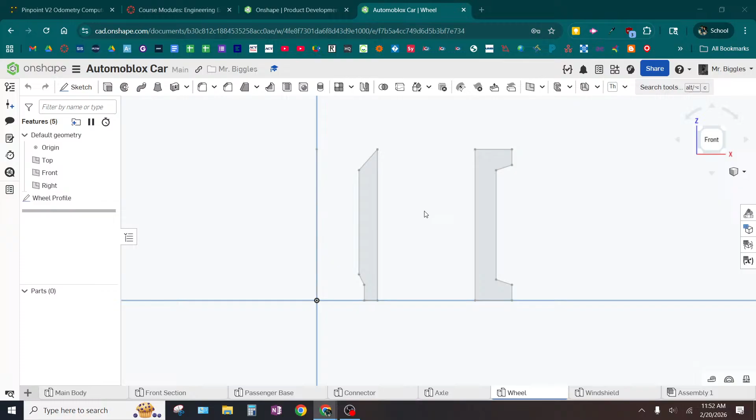So yesterday we got to this point, and I would encourage you to get back into that sketch.

So this here is like the outer wall, and this is the inner wall. Don't do this, but I'm going to just quickly revolve just to prove what this is going to look like. So that's kind of how that's going to turn out. Okay, we're good, we understand, I hope.

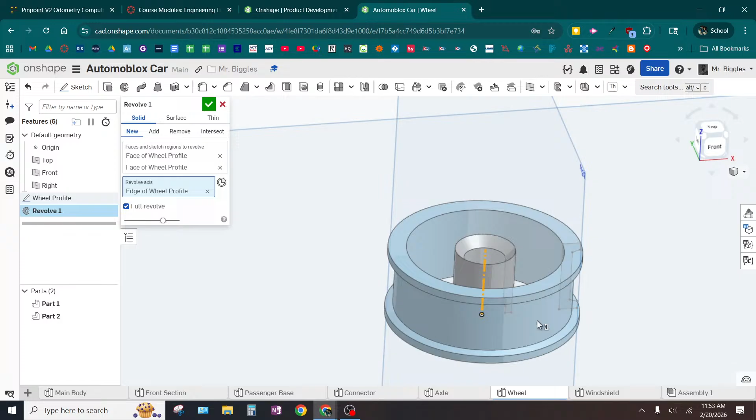All right, so I'm in this sketch, and what I want to do is work on up here. This is like the spokes of the wheel, basically. You actually aren't really doing much at this stage. In fact, you're basically just creating a solid disc that you'll cut into or pattern later.

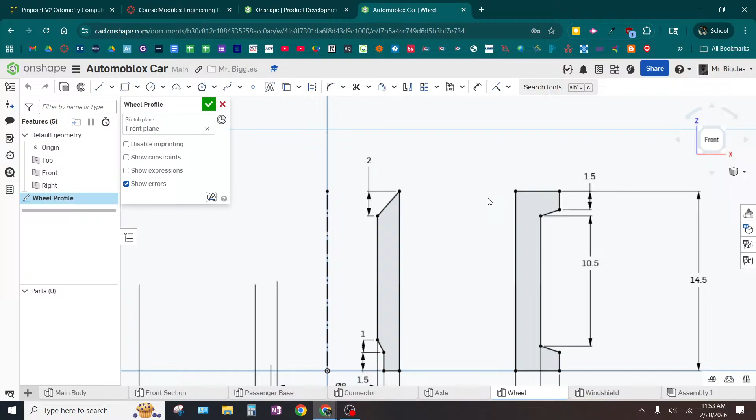So look at your spokes. Most of you, the top is probably flush. I think the purple wheels go in some, and I think the light blue wheels kind of curve out some. But the green, the orange, and the dark blue is just flat.

You do whatever you want, but if it's flat, well, that's really easy. Straight line, easy, problem solved, right? If it's not flat, it's just going to be angled, right?

If you want to do curves, remember, we have arcs. You could do a 3-point arc, okay? That's only going to be part of a circle, though. If you want some curvature that's maybe not symmetrical, remember we do have the spline.

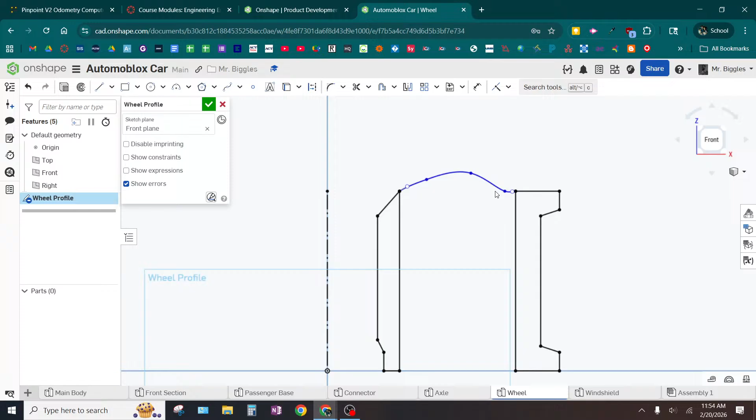So like, you could kind of, I'm exaggerating this, but you could do some crazy stuff like that, right? Probably less exaggerated, might be more like that, right? You could do that. Whatever you think is appropriate.

I'm going to just do a straight flat line. The bottom is a little different. So the bottom, it depends on your wheel. I think for most of them it's mostly just straight and flat, but there is a little bit of rounding, I guess like you'd call it fillets or whatever.

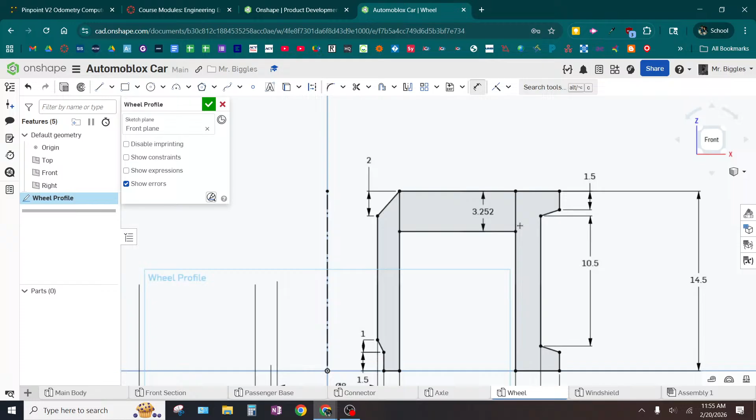So I got a line I'm going to draw across. Ooh, that lagged. Okay, I got a line there. It seemed to be about 6 away. So how did I measure that? I'm using this thing, I thought this was the easiest. I kind of just stuck it in there and just saw how far it went until it kind of was flush with the bottom.

So I got 6, might be a little too much, might be less than that. Let's try that one again. Maybe only 5, probably more like 5.5. Let's just go with 5.

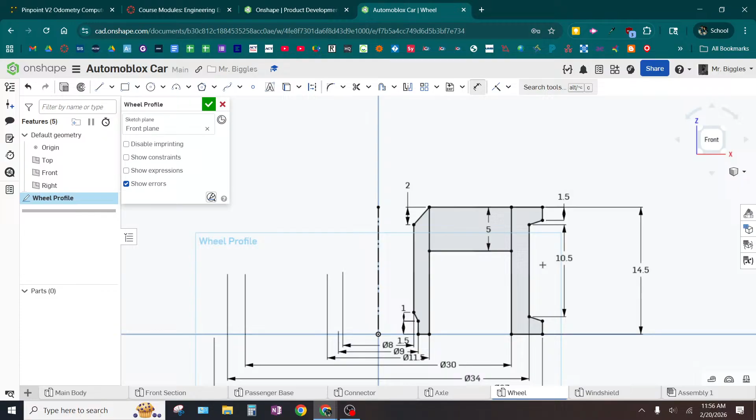Okay, and if that's all you do, that's fine. I do see a little bit of rounding, so like I could do a sketch fillet there, and there. Could do a sketch fillet. Okay, I don't know that it's really going to be perfect, but if you wanted to, I'm going to do it for demonstration purposes.

Going to make it, let's try 2. Yeah, I'll do 2.

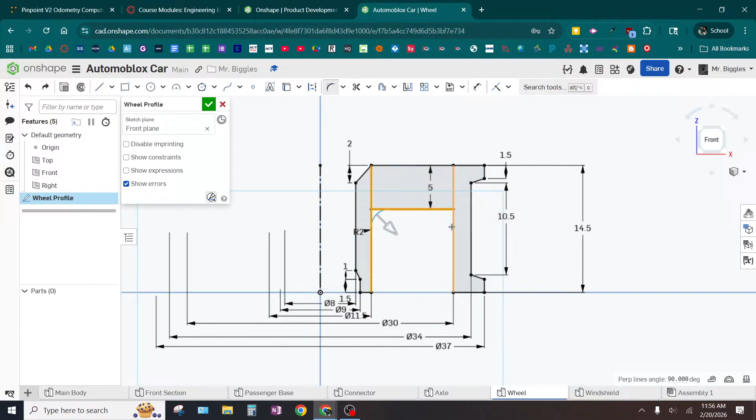I guess I have to do them separate. Unfortunate. There's one. There's another. Notice when you do that, it breaks a lot of your stuff. So if you don't want to do that, don't feel obligated to. But that would be kind of a way to get some of those curves.

All right, so you got options. Let me give you a moment.

Once you got that figured out, you can finish your sketch and we can go do the revolve. Okay, so I'm going to do that. I'm going to keep this one simple.

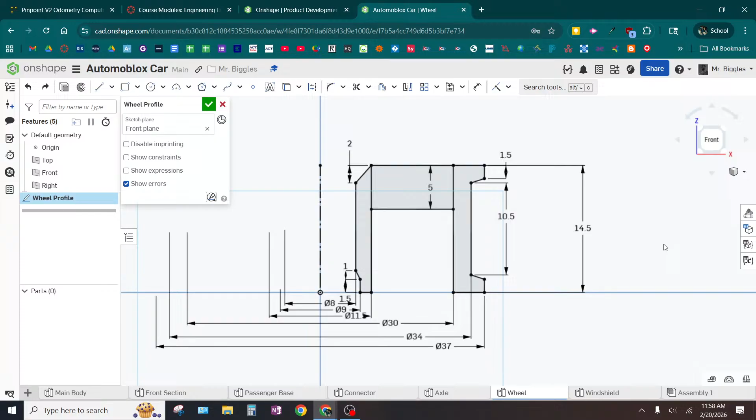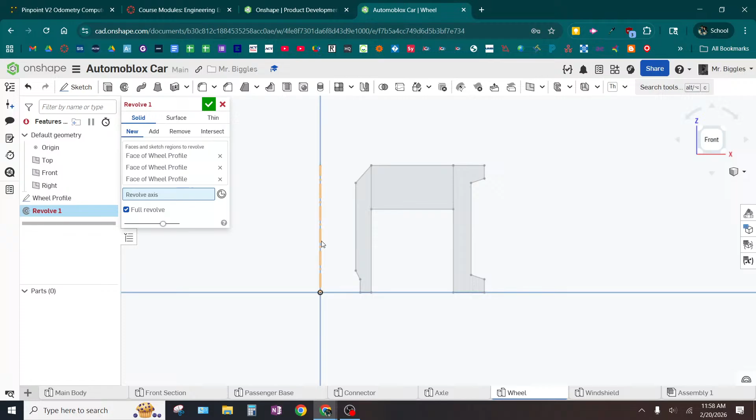So now that I'm done with that sketch, I'm going to go to revolve. Okay, so the first box says faces and sketch regions revolve. So I'm going to click on all the things I want to revolve. And then those revolve axis is red, so I click on the red revolve axis. Now it's blue, blue means anything I click is going to get fed into that selection area. And I'm going to click on this construction line here, and then revolve that profile around.

I don't know if you guys are having internet issues, or if it's just me. Just slower. Yeah, but that's it.

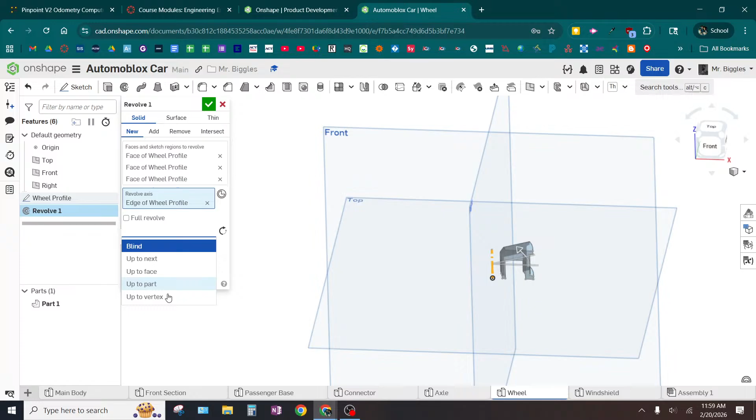That's the revolve. Now, a little aside, you don't have to do a full revolve. You can check this off, and it's really slow, but you can tell it to go a certain number of degrees. Like you have options here. Okay, you have options, but we just want a full revolve. Okay, and I'm done.

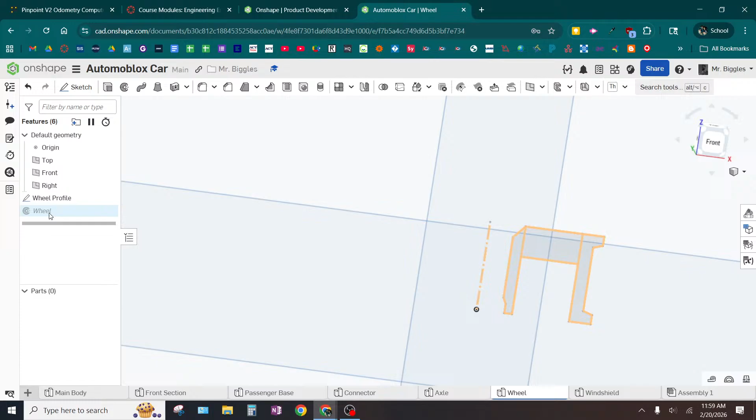So this would just be the actual wheel, the main part of the wheel. And then you look at it - it should be all blue if you connected the inner and outer wall. So in this sketch, I connected the inner and outer wall, so everything should be one part. I shouldn't see multiple parts down here.

If you see multiple parts, either you did not connect them, which could be by choice, or you just designed it wrong. Questions?

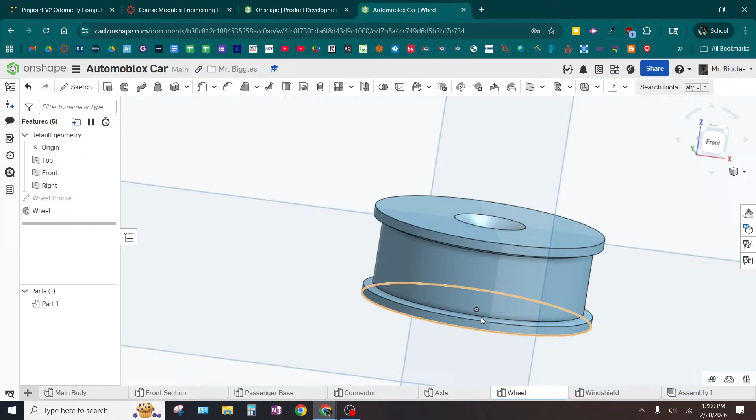Right, we're gonna move forward. So we're gonna sketch on this top surface of the wheel, and our goal is to make spokes. I'm going to show you a few different ways to make spokes.

Effectively what we're going to do is make like one, then use a circular pattern to pattern that cutout. So we're not creating the spoke - we're actually cutting out stuff in between two spokes, and then we're going to pattern it.

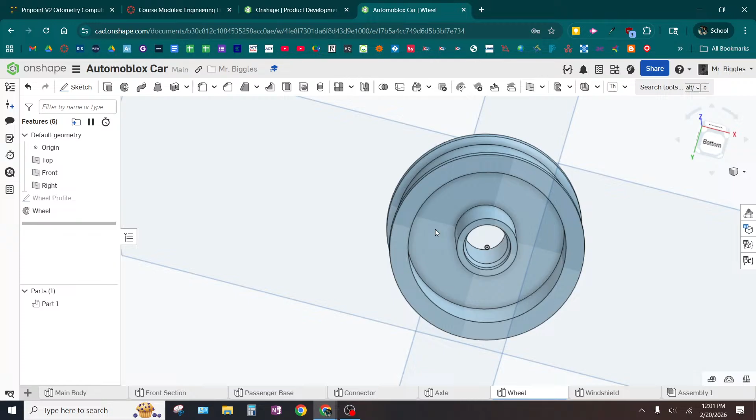You could do this a totally different way. You could create the inner and outer wall and not draw this connecting part in that profile sketch, and then create on this sketch the spokes and pattern the spokes. You got options here. I decided to start it connected because I thought that'd be easier.

So what I'm going to do is make a sketch now on the top. I'm going to name this sketch 'spoke,' singular, because I'm only making one. Technically, I'm actually making the gap between two spokes, but whatever.

Before we start sketching anything, you are going to want to project these inner and outer rings, because that's kind of where you're drawing in between, right? I don't want to interfere with my walls - I want to just interfere with this connective part in the middle.

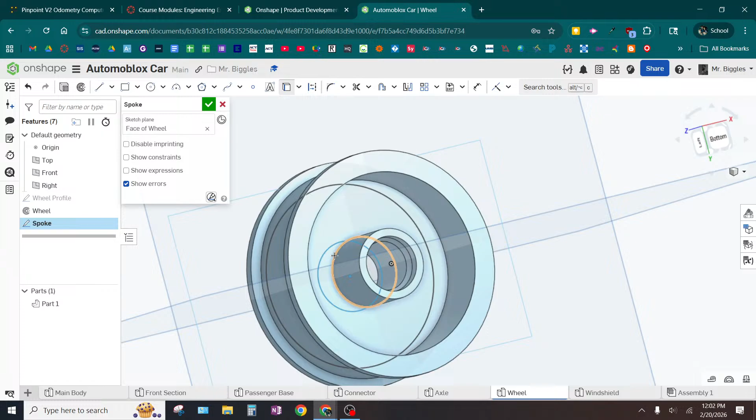So I'm going to click on the Use Project / Convert button - it's next to the A and the Construction button. You click on that, and then you can click on the inner edge, click on the outer edge. And then when you turn around and look at the top, you should see those two black circles, corresponding to the boundaries of the walls that are hidden because they're underneath. Questions thus far?

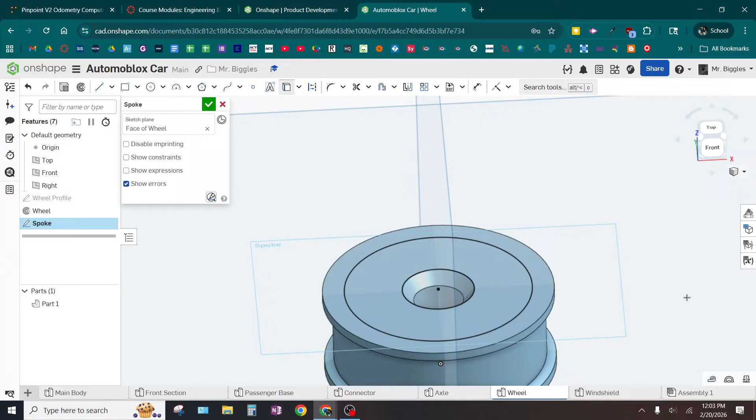So I'm going to draw a spoke. And by a spoke, what I actually am going to do is draw like a void. That makes sense, right? Okay.

How many of you have the green? The green's just like basic lines. Yeah, okay. So the voids for the green would be triangles, right? Effectively, or something like that. Okay, looks like a pizza. Not like fill it. Yeah.

So I'm going to show you - I am not trying to dutifully replicate a specific wheel. I'm showing you techniques to create spoke-like things. We understand? Yes, say yeah? Okay.

So what we could do here, again, I'm on the top sketch. I am going to draw straight lines that go from the origin to this outer circle. So yes, it's kind of like a pizza slice, right?

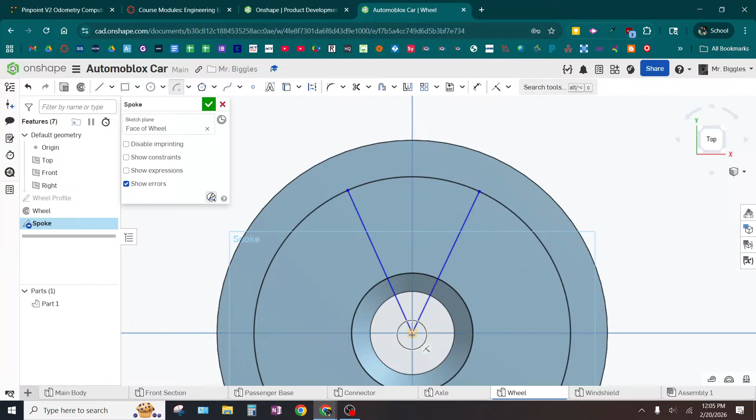And then my second click is going to be right where that line intersects this inner wall, and the third click is going to be on the other line. So notice I can now select this pie slice or pizza slice region - I had to draw that arc to make the beginning of an enclosed shape.

I'm going to do this again, all right - center point circle. I'm going to do the center here.

And then the second click is going to be up here where the line meets the outer circle. The third click is going to be like where this other line meets. I don't know, that got backwards, I don't know what happened there. Oh, maybe I clicked on circle. Not bad, here, arc. There we go, better, click on that.

Second click. Third click. And now you'll notice I can actually select. Do you see how I can highlight this region? You got to do those arcs to get the top and the bottom. If you don't do that, unfortunately what will happen is you'll just have two lines, and you could select the entire area, but it would include this, and you may not want that. I want to be able to select just that.

Now, if you do a quick horizontal constraint, that lines up this vertex with this one right here, that will make this slice, this pizza slice, symmetrical about this y-axis, which is handy. Notice now, by doing that, these two parallel each other - not parallel, but they mirror each other. We see that? They mirror each other.

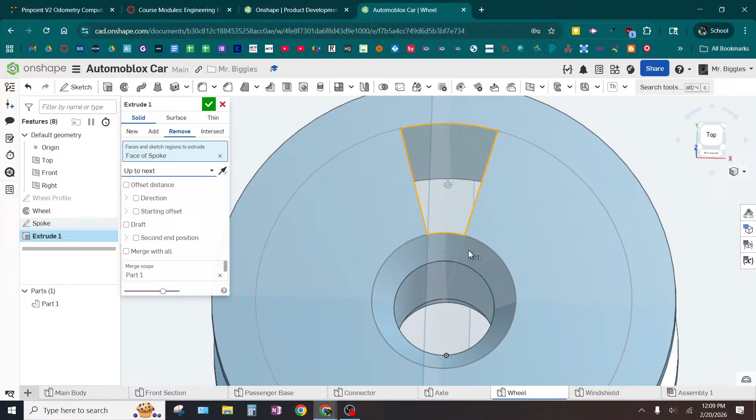Yes, yeah, yeah, and that is one spoke - or at least it's the gap between two spokes. I could even call it the spoke gap instead of spoke. That might make it a little bit less confusing or ambiguous.

Now what am I going to do? Got my spoke gap made. Now what would I do? Pattern, it's just a circular pattern. So we have mirror and pattern kind of close by. Here's the pattern button - you got to click the drop down to choose circular pattern.

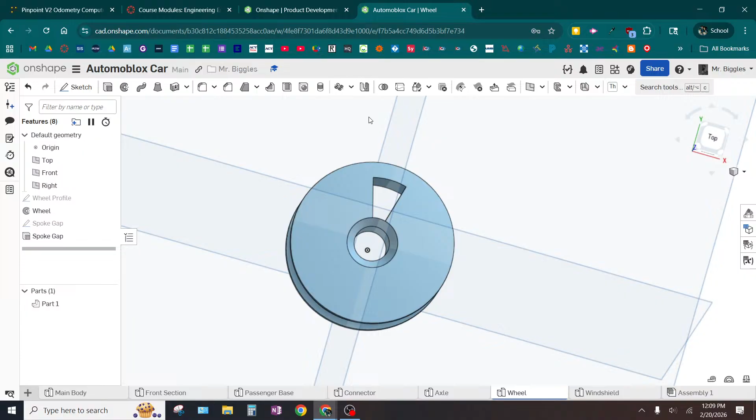What is the first thing you need to do in order to use the pattern? Change it - it defaults to part pattern. You're not patterning this entire part, you're patterning a feature. So you got to click on this and change it to feature pattern. And then you can try and click on stuff, but honestly, if it's like a cut, what are you going to click on? Nothing? That's not going to work. So click on it over here - you can click on it over here, the table of contents.

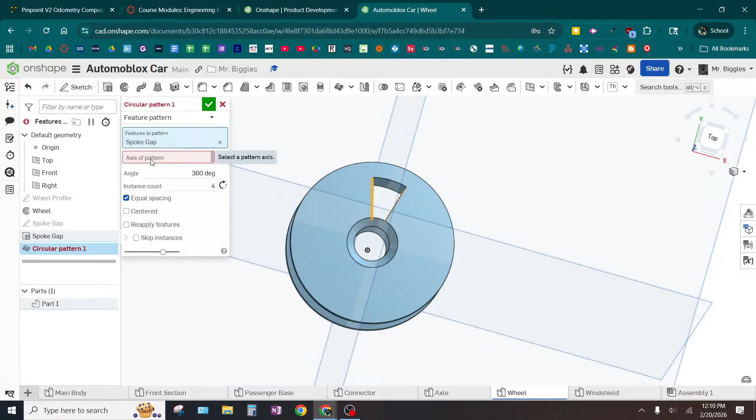I can pattern the spoke gap. And then axis of pattern, I can click on that. And you can click on literally any circular edge - like I could just click on the outer circle, doesn't matter. I could click on any of these inner ones, doesn't matter.

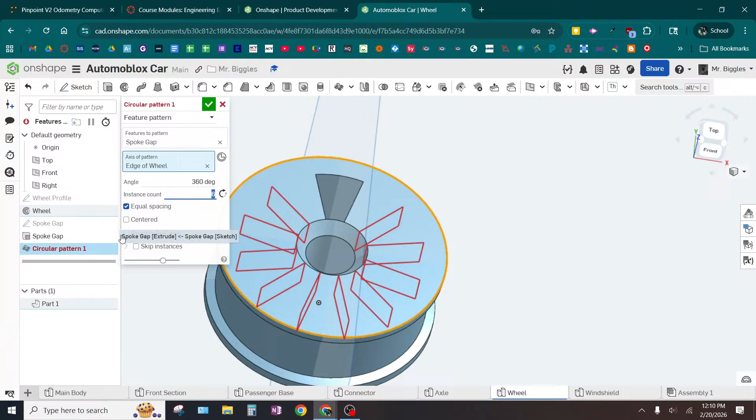Now, how many of these do we want? 6, let's say you want 6. Type in 6. If it's red and not previewing, remember the pro tip here - if you're having issues, select reapply features. And there it is, it's beautiful.

This is what I'm going to refer to as the poor man's way to make spokes. Now, those of you who have the green wheel, that is wrong. And I'm not just talking about the dimensions - there's something fundamentally wrong with that. That's not a dimension issue.

And this is actually true for the dark blue, maybe, yeah, true for the orange, the purple. This is something that would be true for all of them that this failed to account for.

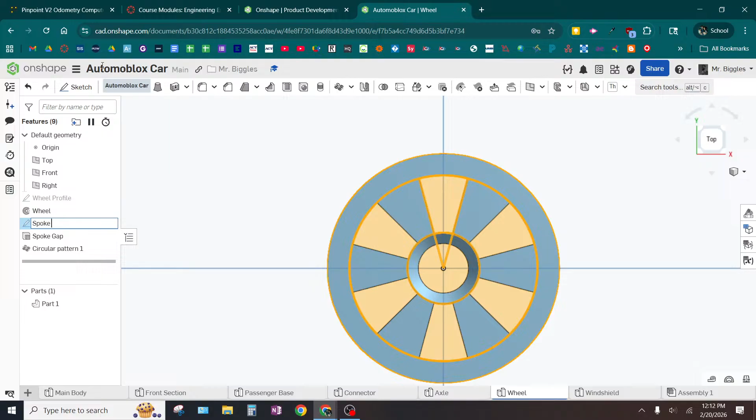I'm going to call this spoke 1, and I'm going to call this spoke 2. Sorry, spoke 1. So the icon tells you what it is - we got a sketch versus a feature versus a pattern.

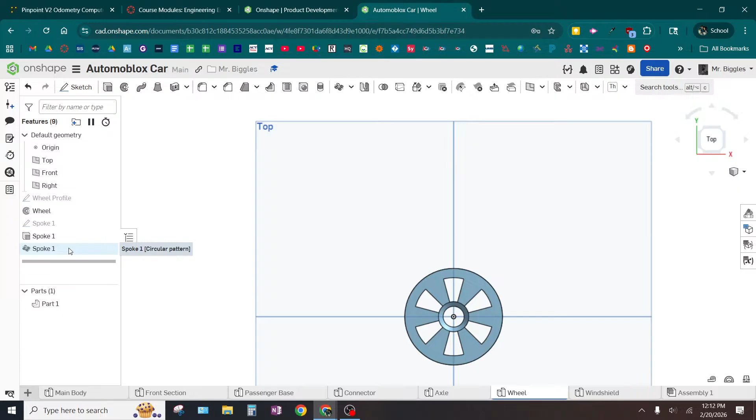This is a really cool thing. You can right-click on something - like I'm going to right-click on the pattern, and I'm going to choose suppress. Right-click on the extrude, suppress. I'm going to go to the sketch, and I'm going to hide it.

So if I ever want to bring that back, it's literally 3 mouse clicks away, right? But if I don't want to bring it back, I want to try some other stuff without having to redo all my work, I can just leave it and move on. We're going to do another spoke.

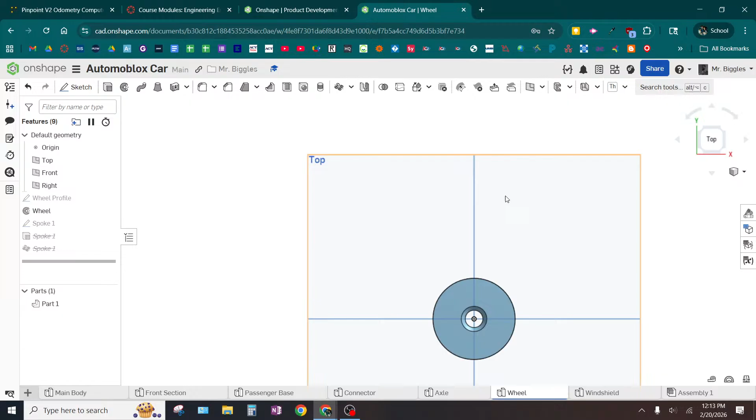Sketch. I'm going to click on the top. We're going to do a completely different spoke design. I'm going to still use the project/convert to get this outer ring and this inner ring.

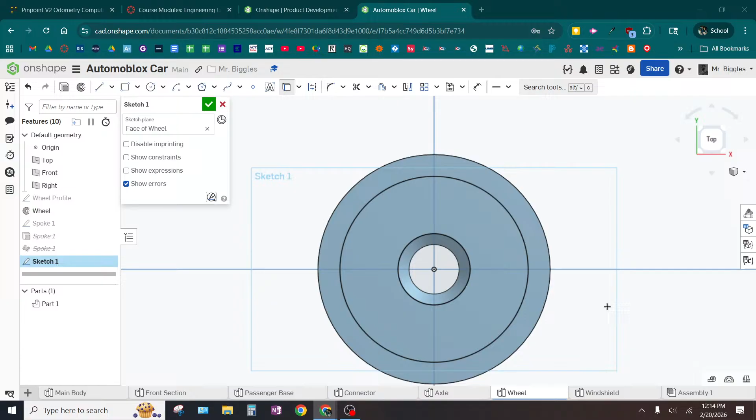We're going to now try and make the spoke the same way, but instead of having it get thinner and thinner as we get closer to the center, I'm going to make the lines parallel. So how do you do this? Well...

You draw a line, okay, like this, and another one like this. They went from the center out to the outer circle, yeah? But these aren't going to be the edge of the parts that cut out - these actually are the centers of the spokes. Make sense? Yeah, okay.

Now, if I have 6 spokes, how many degrees are going to be between 2 adjacent spokes if there's 6 of them? We just did this math - 60. So I can dimension that. 60, right there. Easy, 60.

I can then do a horizontal constraint to line this vertex up with this vertex, just so it's symmetrical. Sound good? Yeah? Be very clear, I just drew the centers of the spokes. I didn't actually draw the edges of the spokes.

Now I'm going to draw the edges, and watch what I do here. I'm going to click on this circle, but see that parallel auto constraint? This is parallel to that center line that I drew. We see that? And I'm going to do the same thing over here.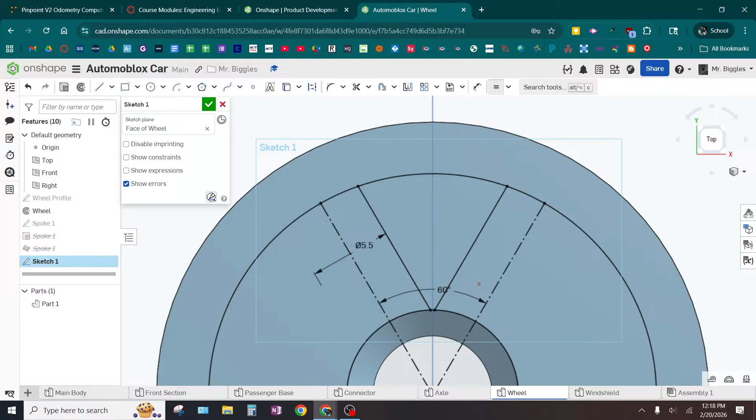In the very specific case of the green car, it might be the case that this actually comes to a point right here. And if that's the case, you won't even dimension it at all. All you would do is just do a coincident constraint and make that vertex touch that vertex.

So I'm showing you some different options. And now I got my pizza slice, don't I? What am I missing though? You can't see it, but it's definitely missing. We had to do it the last time.

If I don't draw this, I notice I can't select this region. I got to draw something to have this region be selectable. What do I need? I did it for the last one, twice in fact. I only got to do it once now since I made these come to a point.

What do I need? Because this is not an enclosed region. I got an edge, I got another edge. What do I need to make this an enclosed region? The arc? Yeah, I need a center point arc.

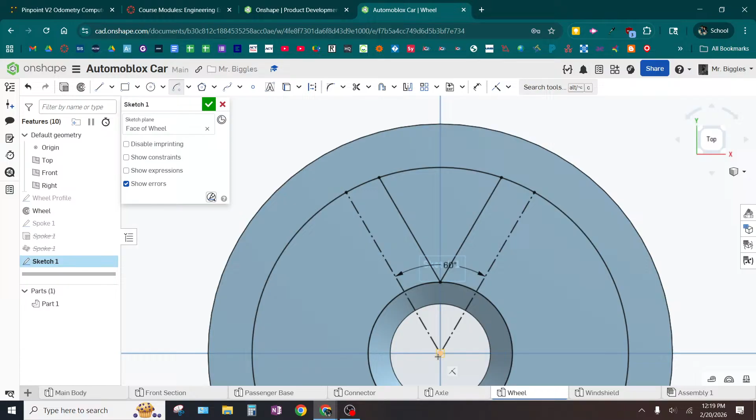So I'll do the center point arc real quick. Center's here. I'm going to go from there to there. Now suddenly that's an enclosed region, and I can now go do all the stuff.

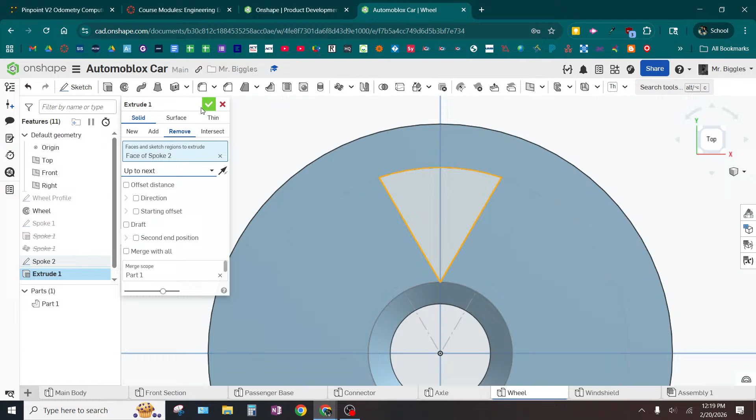I'm going to call it spoke 2. I can now do all the stuff that I did before. I can extrude that, remove. I'll go up to next. Okay, this would be, again, spoke 2.

And I can circle pattern it. Entities of pattern, click on spoke 2. Make sure this says feature pattern. Axis of pattern, I can click on any circular edge. I want 6 of them. I do need to reapply the features for whatever reason that makes you do that. And this is, again, spoke 2.

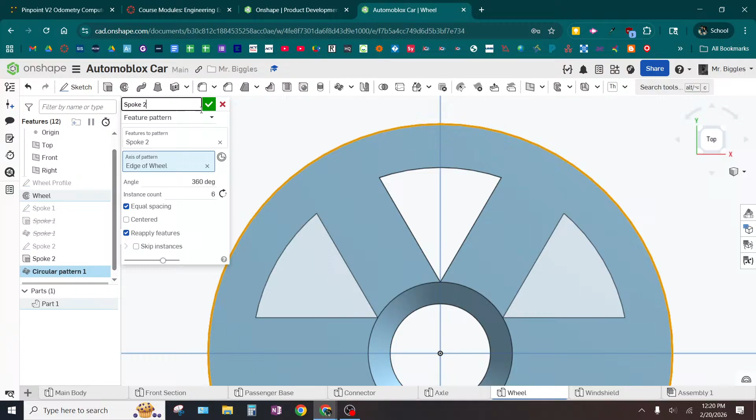Notice how those now, it's the exact same width the entire way, right? This looks very close to the green wheel. Almost identical. We good? Any questions?

Okay, I'm going to show you one more thing here. And then we're going to be done with spokes.

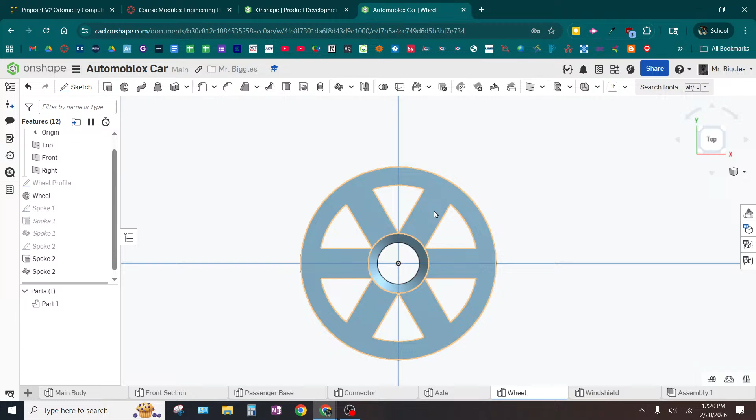So I'm going to, again, suppress, hide. Round 3, okay, I'm going to make a new sketch on the top of my wheel. I want to call this spoke 3. I'm going to use project and convert.

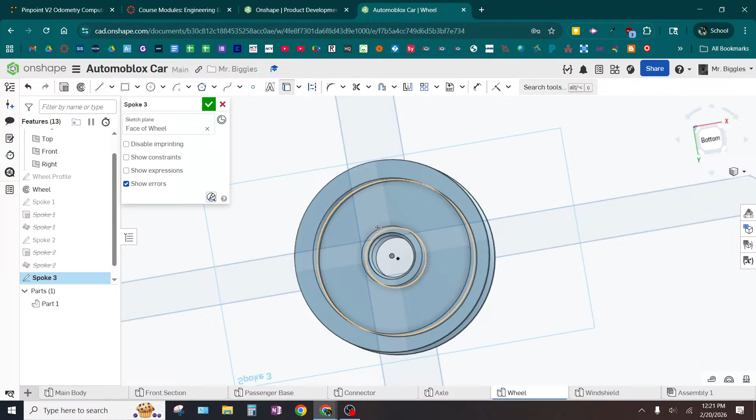To project that inner and outer limit on where my spokes actually exist. This time, though, I'm going to do a curve. This is going to be similar to what you got with the light blue wheels. So I'm going to do a 3-point arc. Okay, 3-point arc.

Point 1's over here. Point 2's over here. Why is it not letting me click? There's point 2. And then I kind of just got the center. You can see what I'm doing here.

But there's different things I can do, but that's kind of how I get this arc. The center just kind of is whatever. You do want to have your center, see that snap too? If I click and drag and move it around, I can lock it in. You do want to have your center vertically aligned with the origin. Does that sound good?

Do you want it to be on this circle? Maybe you do, maybe you don't. That's a choice. I'm going to do it, but that may or may not be what you actually want. And now all I got to do is dimension this.

One thing that you could dimension is the distance between these two. That is something that'd be easy to measure. Maybe that's 14, I don't know.

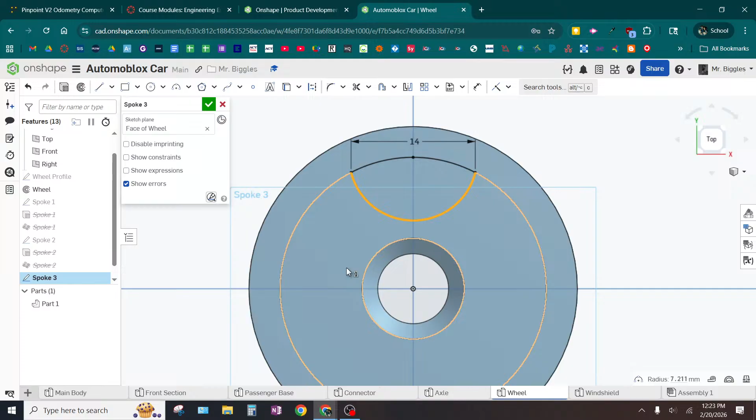But that's a way to get kind of a curve thing, and then you do the exact same game that we've already done. You do need to do the center point arc to get the curve for the top part, so that this is an enclosed region.

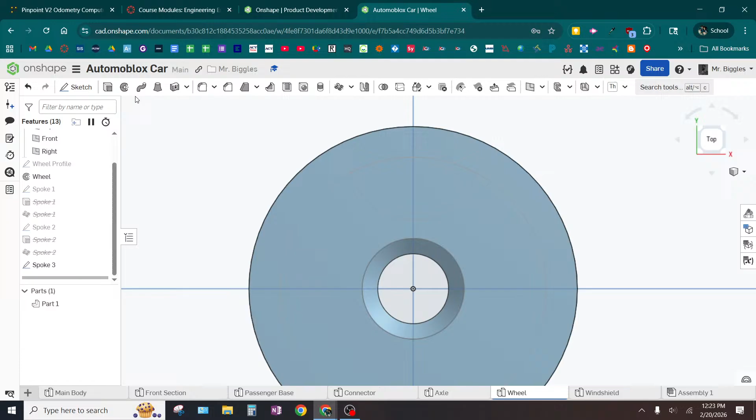Extrude, remove, up to next. That is spoke 3's extrusion. And then I want to do a circular pattern.

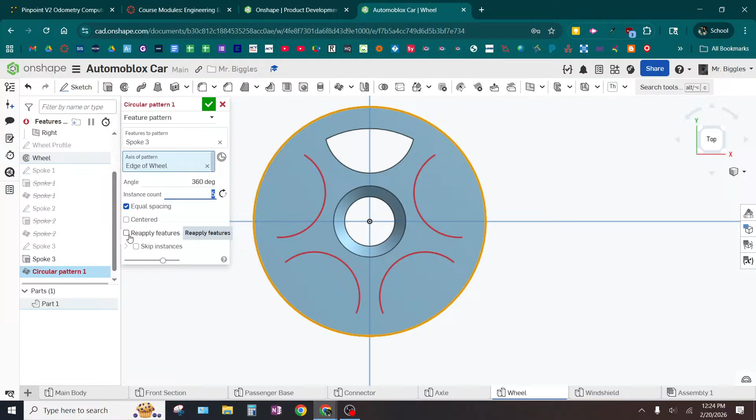I change this to feature pattern. I click on spoke 3, axis of pattern, any one of these circular edges. And maybe I think there's only 5. Maybe there's not 6, maybe this one just has 5, or 4, or whatever it is. And then reapply features if you're getting errors, reapply features.

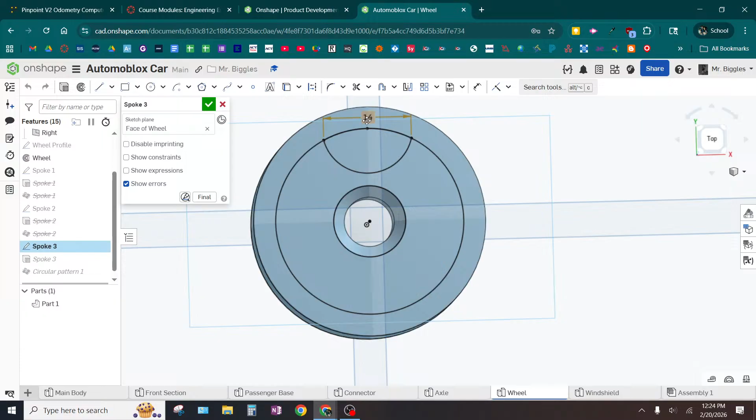That's kind of cool, isn't it? You got nice curves, right? That may not be the exact curve you want. Maybe that curve needs to be different. Like maybe the center of this arch does not actually lie on this circle. Maybe this dimension needs to be a different number. Or you do you, but that's the premise, that's the basic setup for getting kind of these curves.

Serious lag today with the internet.

That's about it. There's really only a couple more things that would be conducive to the actual wheel shapes, the actual wheels that you're physically making measurements of.

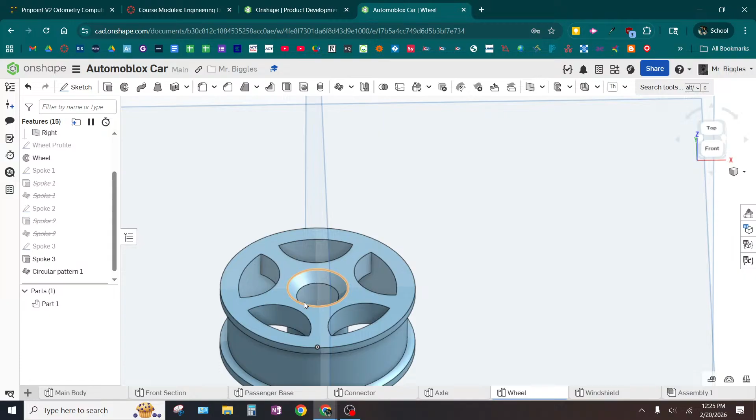One, you gotta do your fillet. So you gotta fillet this edge, and you gotta fillet this edge. So I'm gonna go to fillet. I'm gonna click there.

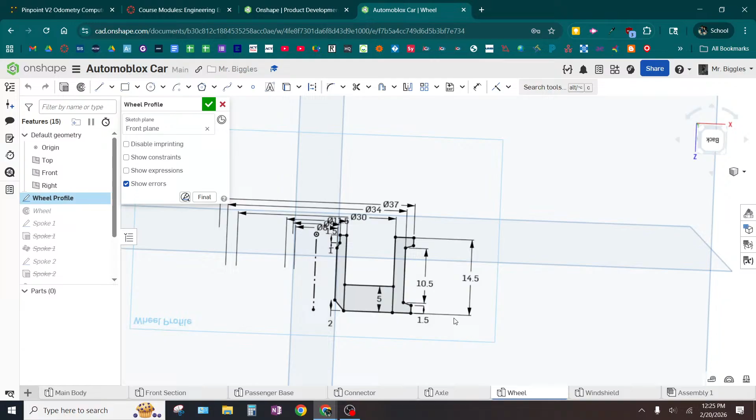How big is that fillet? Well, I'm gonna give you a pro tip here. I would make the argument that that fillet is actually probably the full width of this. How wide is that line? Can we do math today? It's not directly dimensioned, but you have the dimensions you need to calculate it. 7, it's not a bad guess, but what are those numbers 37, 30 actually dimensioning?

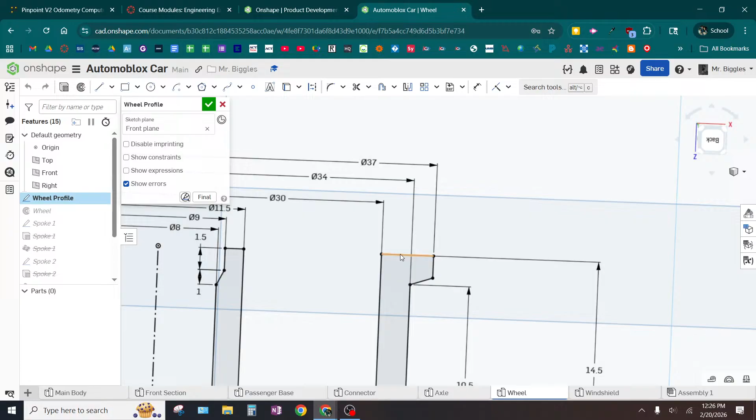Because that gap is not 7. You're somewhere on the right track, but it's not 7. So this 30 and this 37, that's a gap of 7, right? But those are diameters, so it would be half of 7. Yeah, it would be half of that, right? So 3.5. I'm going to just assume that the fillet is 3.5.

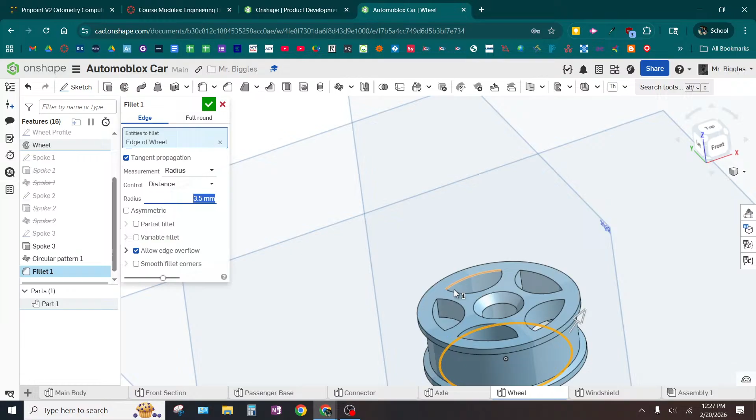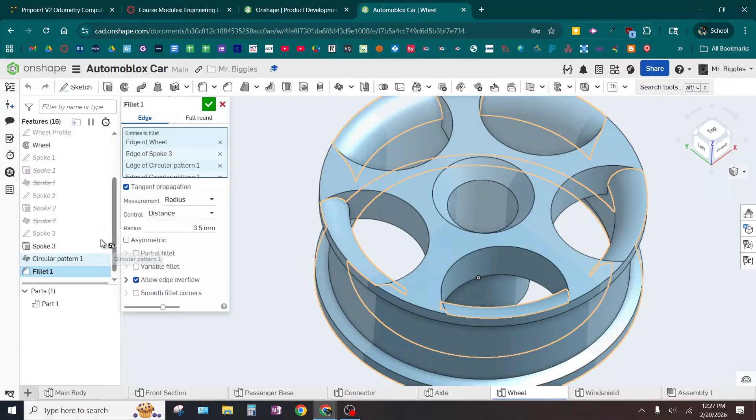When you fillet these, you can select each of these separately, and it will work. If you think that fillet is too big or too small, you can adjust it. It's very easy, you just go back into this fillet and you can type in a different number. Maybe I don't think it actually goes all the way to the edge, I think it's only 3. I can do that, easy enough.

You can fillet other parts of your spokes if that's relevant or necessary. You think it'll help make it look more like the way it does in reality, or maybe just like your hope is, just make it look cooler. It'll just look cooler. Sound good?

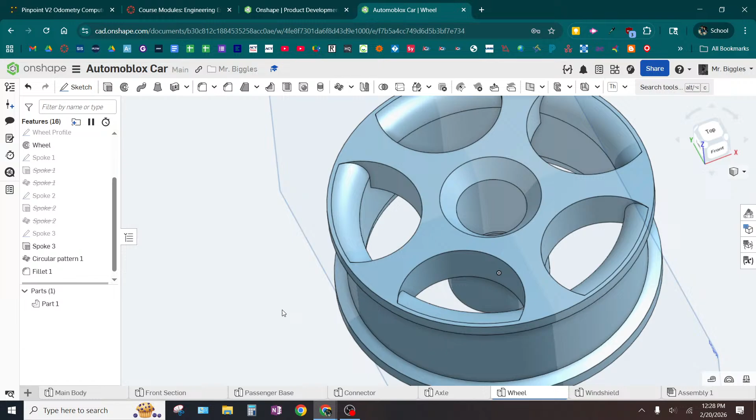Last thing, if you look very carefully—and it does depend on what wheel you have—if you look carefully at the bottom of your wheel, your spokes might not be completely solid and the same depth or thickness the entire way. If I recall, like on the light blue and I think on the green, it's kind of hollowed out some. So you would just go look at the bottom and you can do a shell.

Look on the bottom and you can put whatever number makes sense. This may not work out super well. Shells do not always work out, I've had tons of issues with shells. So if you're not getting it to work out, don't hate yourself, don't think you're dumb, don't think you did it wrong. Shell is not a reliable feature. I'll say that right now, it's just not.

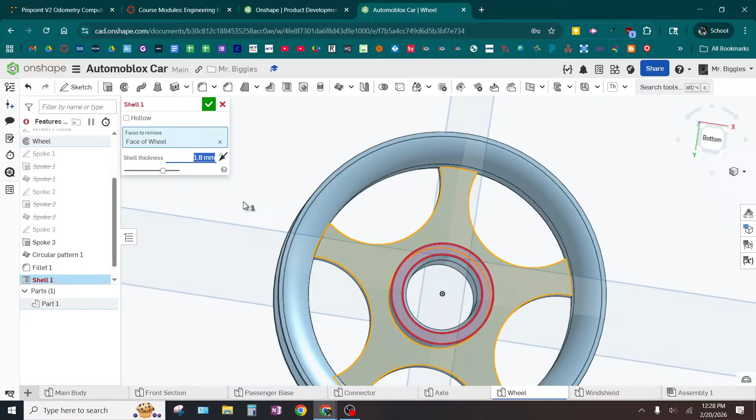Could you draw a rectangle in there and then just reverse extrude until up to the point of the spoke? You can, but on this one, those spokes aren't the same size the whole way down. You'd have to redraw, you'd have to do a manual shell, redraw all the edges and contours, and then extrude a specific depth. And I'm not gonna lie, probably not worth it. The whole point is for you to know how to do the shell and the other sketch techniques that I showed.